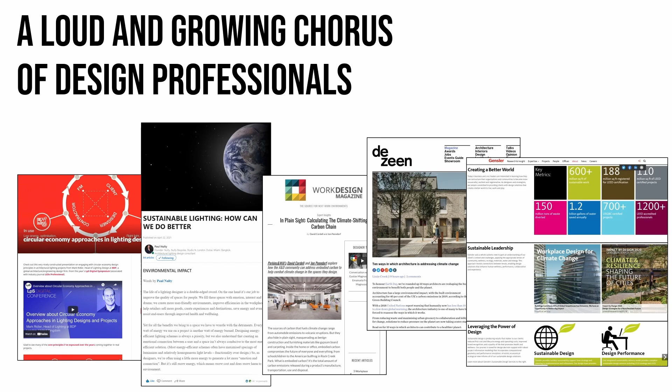For decades, we've heard leading minds warning of the imminent dangers of climate change. Finally, we're seeing the architecture and construction industry stepping up to address its negative impact on the environment. In lighting, we're looking beyond simple energy efficiency and starting to consider the holistic impacts of architectural lighting, from sourcing materials to production of fixtures to operating them to maintaining them and ultimately disposing of them. And this is really forcing both lighting manufacturers and lighting specifiers to consider their environmental impact.

But what we see is that the legacy lighting manufacturers are largely not acting. They remain frozen in the old ways of designing fixtures, producing them, and sourcing their supply chains.

So it's really going to fall on the lighting specification community to ask the tough questions, such as: why do our lighting products use such energy-intensive materials? Why do they use so many toxic petrochemicals? Why don't project owners hold the lighting industry accountable for life cycle costs? And if we stop and consider for just a second, shouldn't sustainable design and manufacturing lead to radical cost reductions? Why do sustainable options continue to cost more than traditional products?

For the 15 years of the LED lighting revolution, the lighting industry has largely been fixated on two metrics: lumens per watt efficacy and cost reductions. And that's led to rampant greenwashing in the industry.

William McDonough is the author of the Cradle to Cradle standards, and I love his philosophy that striving for zero is not a noble goal. The problem in most industries is they've been on a sort of less-bad trajectory, trying to reduce their impacts to nothing, as opposed to striving to create positive impacts on our planet and ecosystems.

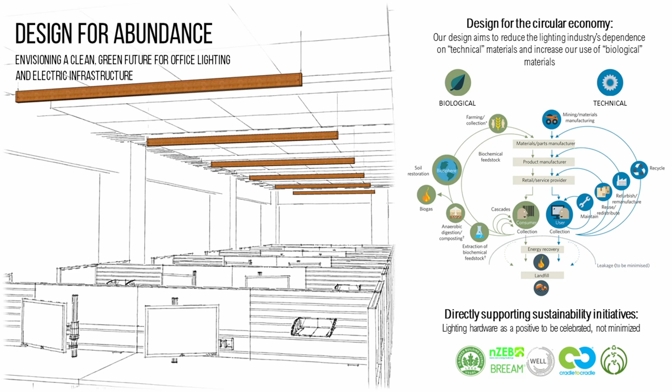And what I did is look at the separation of technical and biological materials, and really ask: why do we need so many technical materials in a standard lighting fixture? Why can't we push more of the material content towards biological, where it takes far less energy to produce and recycle these materials? This brought up a very interesting problem I've had over the years in product development, in talking to well-intentioned engineers who've argued with me over materials.

Generally, they've said that aluminum is a perfect circular economy material. It is durable. It can be recycled endlessly without degrading, whereas wood, every time you process it, degrades. It's very hard to argue with this, but it never felt right until I started to address the supply chains,

and I started to challenge people to say: would you want to live next to any part of that supply chain? In the case of aluminum, would you want to live next to open pit mines? Would you want to live next to smelting facilities? Would you want to live downwind of a petrochemical cracking plant for that powder coat paint, or downstream of an anodization plant? And I think the answer is pretty clear. No. No one wants to live next to any part of that supply chain.

Whereas with biomaterials, it's generally the opposite. Would you want to live next to a forest or a wood shop, or a farmer's field where the products are decomposed at the end of life?

I think generally people have no problems living with that. In fact, many of those are considered benefits to society.

So I chose bamboo for the main body of the fixture. It's a quick-growing grass with lightweight harvesting and processing, so it actually sequesters carbon in its mass. It has a very good fire rating, and it's strong, straight, and true, so it can largely stand in for many of the properties people want in aluminum extrusions.

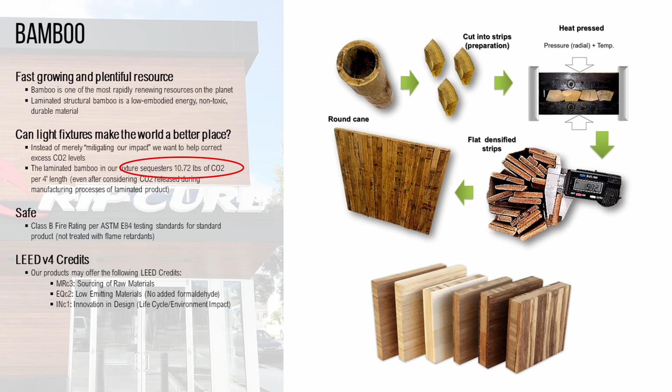I then found a startup company in London making bio-based circuit boards produced from flax waste products, and flax is what's used to produce linen. So instead of nasty petrochemical cracking plants used to produce the epoxies and substrates for circuit boards, our supply chain is a flax field in bloom in the south of France.

The next concept looks at what adds value to the fixture design. This is the lean philosophy of looking at value-add versus waste. In an electric lighting fixture, the core value-add is converting electrons to photons, and we have these magical little things called LED chips that do this with unprecedented efficacy in incredibly small size.

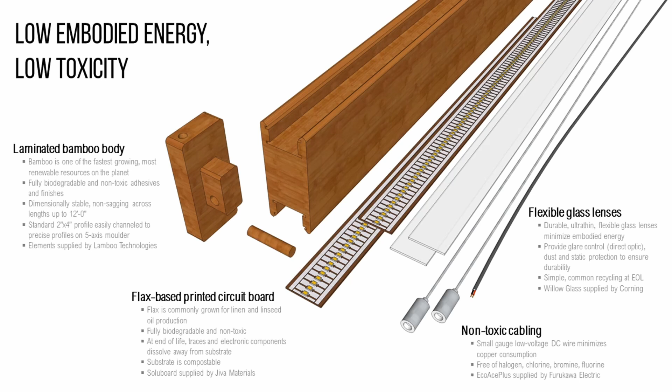So really, that's the only thing adding value in an electric lighting fixture. Now we have a few other requirements—we have to give structure, we have to support those LED chips. You might have other value-adding requirements, such as providing architectural decoration or presence. But in general, there's a lot of stuff in a modern LED lighting fixture that's just waste, which we could simply eliminate with a bit of smart design.

So then we looked at how do we assemble this, and how do we disassemble the fixture at end of life. We chose a design where you can bang out a wood dowel, take the end cap off, and then the LED board and the glass slides out.

So the wood can simply be composted, the glass can be easily recycled through any local recycling stream, and the LED board could be repurposed for several more generations of life cycle because it's starting at such a high efficacy to begin with. Then at the end of life, the LED board itself can simply be soaked in water, the electronics scraped off, and the bulk of it, the board itself, can be composted.

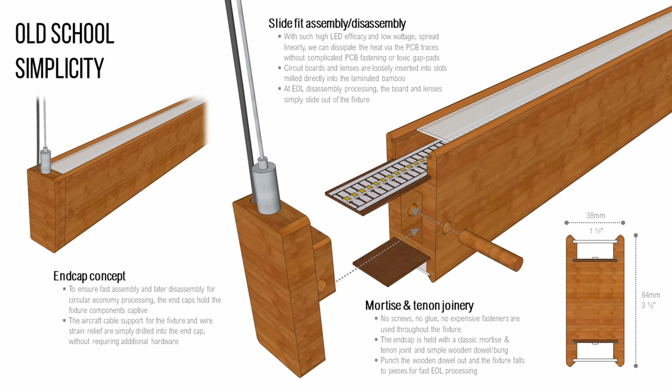And we think in the end it provides a beautiful architectural presence, bringing some biophilic design through a natural material into a space. When either specifiers or manufacturers see this design, usually the first question I get asked is, but what about the heat? Everybody's been trained that LEDs produce heat—it needs to be removed to keep them cool and operating with high efficacy.

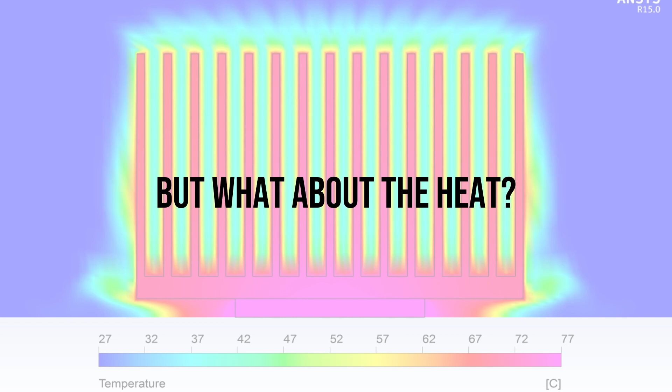But the thing is, today we have LEDs available at 230 lumens per watt efficacy off the shelf. This is not pie-in-the-sky roadmaps and predictions of future efficacy—this is actually available today in quantity at low cost. And that's 23 times the efficacy of an old-fashioned incandescent bulb.

And it's available in such small form factors, half a millimeter square—we're talking literally grains of sand size light sources. So we have these incredible magical little devices that add the key value to the fixture.

And in most linear or planar formats, we've spread the light source out over such a large area, and we're restricted due to energy codes to such low wattage that we simply have low wattage per area. In a linear fixture such as this, you're talking 3 to 4 watts per linear foot. You can dissipate that thermal load in free air with no heat sink, and you can certainly mount it into various biomaterial substrates, and it keeps the efficacy plenty high and the lifetime plenty long.

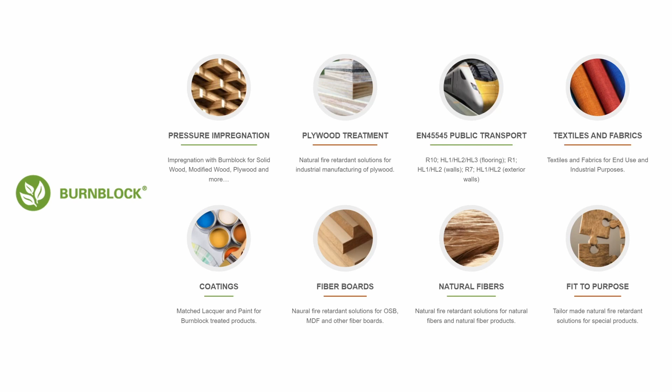Then usually the second question I get is, but what about the fire rating? You're using wood—ooh, wood, how dangerous is that? Well, first off, most biomaterials can be easily flame-proofed nowadays with bio-based, totally non-toxic flame retardants, and many natural materials are inherently flame resistant or totally nonflammable. I'm a bit saddened that when we show natural materials, the first gut reaction is somehow that they're dangerous.

All of this adds up to a new revolution awaiting us in LED lighting fixtures. We already went through the LED revolution for the past 20 years. Now I think the focus is going to turn to really innovative uses of bio-derived materials.

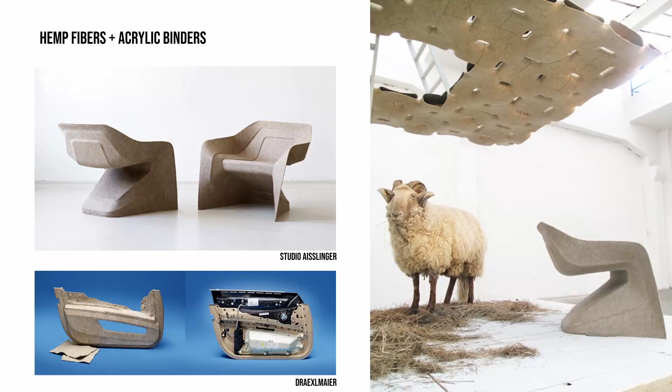We're seeing all sorts of academic and small startups investigating all new types of biomaterials, from agricultural waste streams to fast growth carbon sequestering sources, and really fun things like e-textiles and dissolvable electronics. It's just a very rich, innovative area. And we're going to see some amazing new design concepts and fresh new looks coming out of this material research.

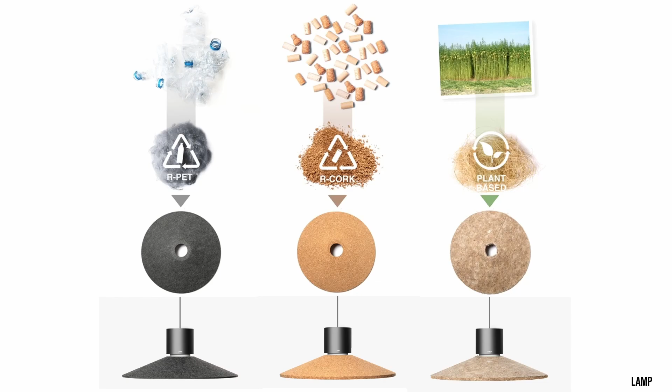This is really driving the lighting industry to move beyond tired old linear extrusions and sheet metal boxes. We're also going to see a revolution in product marketing where manufacturers really detail the source of the raw materials, how it's processed, what it looks like, what its life cycle will be, and give specifiers the choice in those components. This, for example, is a Spanish manufacturer named Lamp, really beautiful product marketing around material selections. I think we're going to see a lot more of this in the very near future.

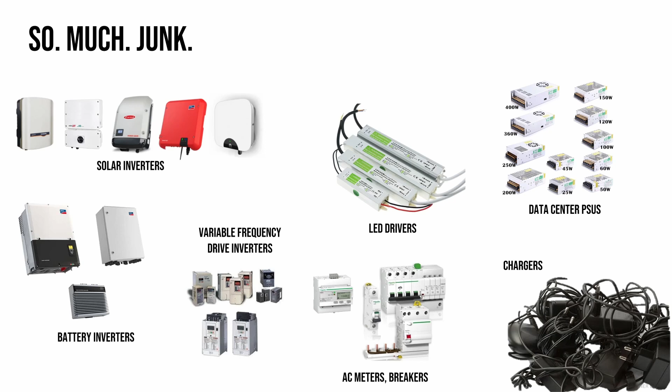The next question I usually get asked is, what about the electronics? And for sure, in modern architectural construction, we are simply drowning in electronics junk. We've loaded up buildings with so many various electronics pieces throughout. It is really difficult to manage. And frankly, there is a very poor story about recycling electronics or converting electronics into a more friendly circular economy approach. I think, though, that the future for lighting has a different tact.

We can't eliminate electronics for sure, but we can dramatically reduce the amount of electronics in our lighting systems. And this is going to come because of DC power.

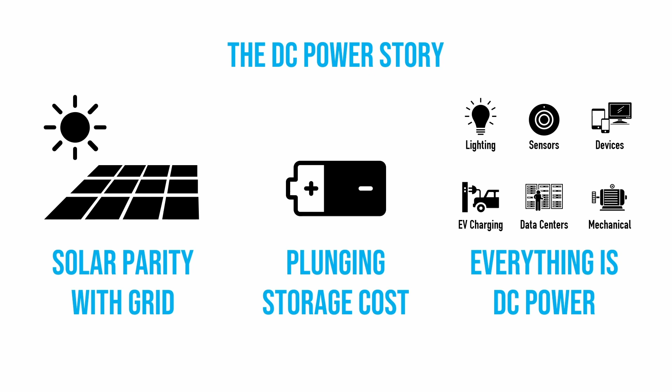In modern buildings, we have three new realities. First off, building owners can pull electricity from solar panels on their roofs cheaper than they can pull electricity from the grid. They can then save that electricity at ever decreasing costs of storage, and everything in a modern building is already DC power. And when you look at large projects like covering the roof of an IKEA or a Target store with acres and acres of solar photovoltaics and trying to be an off-the-grid net zero building project, these small changes in efficacy and these small changes in system costs equal massive cost savings for these large customers.

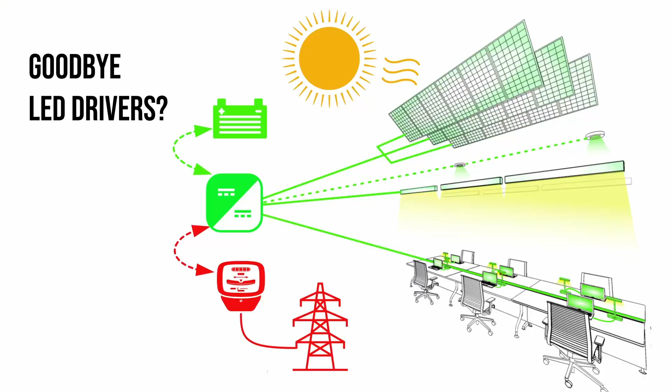So what we're going to see is a future where we want to take the DC power generated directly from the PV panels on the roof and efficiently funnel that into our LED products with the least number of conversions. We're going to keep it all DC, and we're going to use ever more efficient electronics components that are miniaturized, with solid state fault interruption and solid state current control.

The power supply itself will go through a revolution. And I think within the next decade, we're going to see that the overall amount of electronics in architectural construction is reduced by a factor of 10 by going to these DC native systems.

In many ways, for lighting specifiers, it's going to feel a bit old school at first. You're going to go towards more and more remote drivers, sort of centralized dimming racks. We're going to take the electronics out of the fixtures, and they're going to become centralized and miniaturized.

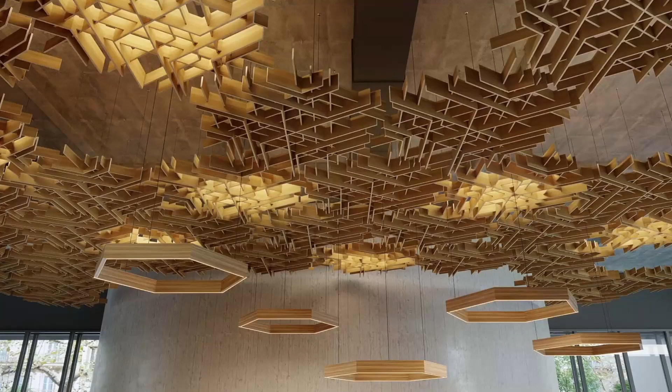So as a specifier, what concrete steps can you take today to start this sustainable revolution in lighting? First off, there's tons of products already on the market that use wood and natural materials, ceiling systems, lighting systems, sort of hybrids of lighting and ceilings. And that's just a great place to get started.

I would also start putting pressure on your lighting reps, your lighting salespeople, your lighting manufacturers to keep this conversation going. So let's play a little game called Stump a Salesperson. The next time a salesperson comes into your office with a new lighting fixture, simply challenge them to send you a list of all the substances used in the fixture by weight. Sadly, this is so uncommon in the lighting industry that the salesperson will probably go running back to the product team, which will then go running back to the engineering team.

And at best, they'll be able to deliver you an engineering bill of materials, which does not actually list all the substances in the fixture. That's where we have to get started. We have to press lighting manufacturers to stop and put the effort into understanding what exactly they are putting in these fixtures. And then as specifiers, we have to start learning what is available to us as options in terms of various types of toxic materials or non-toxic materials or energy-intensive materials or more eco-friendly materials.

And then as the bonus round, you might challenge them to give you an environmental product declaration for the fixture. EPDs are far more holistic. They look at the complete impacts of the supply chain, the complete impacts of the life cycle of the fixture. But they are very intensive and very difficult documents to build.

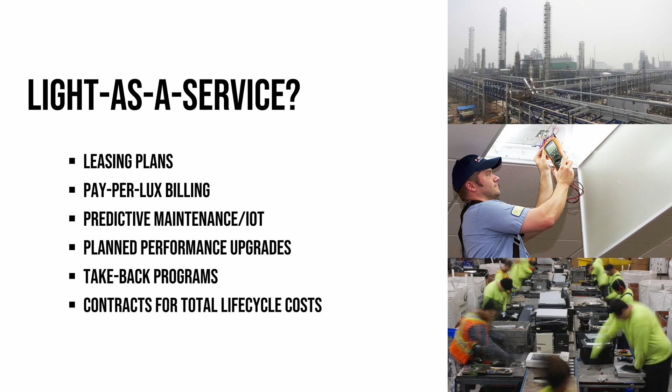Another challenge to think about is simply repairable LED fixtures. The Zhaga standard has been around since 2008, and it is really quite sad that lighting manufacturers did not embrace this. They've been pinching pennies and avoiding modularity, producing fixtures that are basically disposable junk. You as a lighting specifier can certainly put this in your boilerplate or look for fixtures that include Zhaga. Challenge your salespeople - is this module in this fixture a Zhaga standard? And talk to them about it.

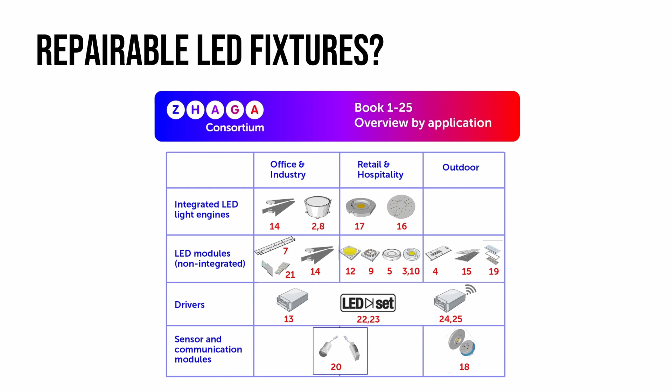As specifiers, you hold tremendous discretion in what you put onto these projects. I would implore you, don't wait for all these sustainable standards to come online and for manufacturers to support them in terms of full product marketing. Just start. Look at these products and in your mind, look at the quantity of materials in them. Do they have any sustainable materials? Give them mental bonus points for being locally sourced, bioderived, or biodegradable. Deduct mental points for the distance traveled for these materials.

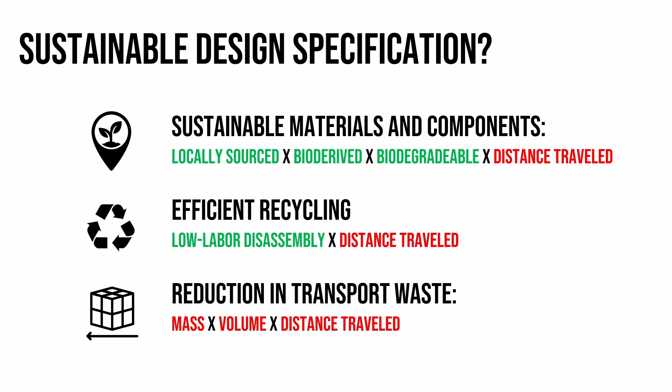Look at efficient recycling, hold the fixture. Is it obvious that it could be easily disassembled at end of life, 15 years from now? Can it be disassembled and put into local recycling streams, or would it have to be sent far for a disassembly process? Just look at the overall reduction in transport waste from original production to end of life - mass times volume times distance traveled, any of those you want to penalize.

There's another huge benefit to sustainability, and that's creating a sort of local economic advantage. If you have repairable fixtures that local maintenance people can actually service, you have smart maintenance programs, you have beautiful factories that can be co-located in residential neighborhoods. You have bio-friendly materials that will be non-toxic in their initial production, non-toxic in their disposal. You create local revenue streams, a localized supply chain, and keep this stuff tied to the neighborhood.

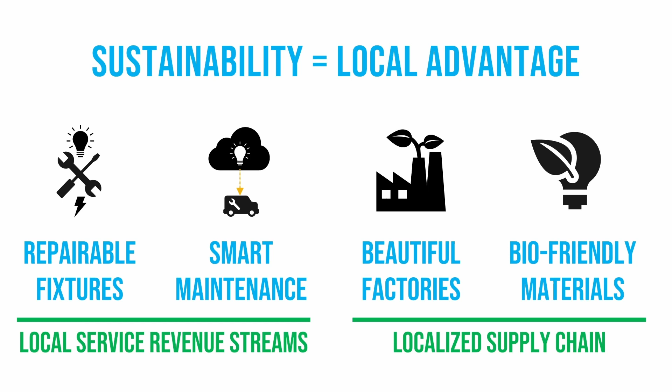And we collectively as an industry have to challenge ourselves. What future are we specifying today? Are we proud of what we're specifying? Are we proud of the future that we're creating?

If you're just starting your own journey into the circular economy, I recommend starting with the Ellen MacArthur Foundation. It provides a lot of the basic jargon and lingo around circular economy practices. And check out Bill McDonough - he's a fantastic speaker, very inspirational. He has a brilliant way of tying economic benefit to sustainable practices.

If you're looking to actually implement sustainability on your lighting specifications, look at Building Transparency, which was an effort started by Skanska, and the International Living Future Institute, which runs the Declare Label program. There's also a variety of other support groups in carbon reduction, non-toxic materials, and so on.

So I leave you with this: you hold the keys to the future today. Don't wait. Please get started. Thanks.